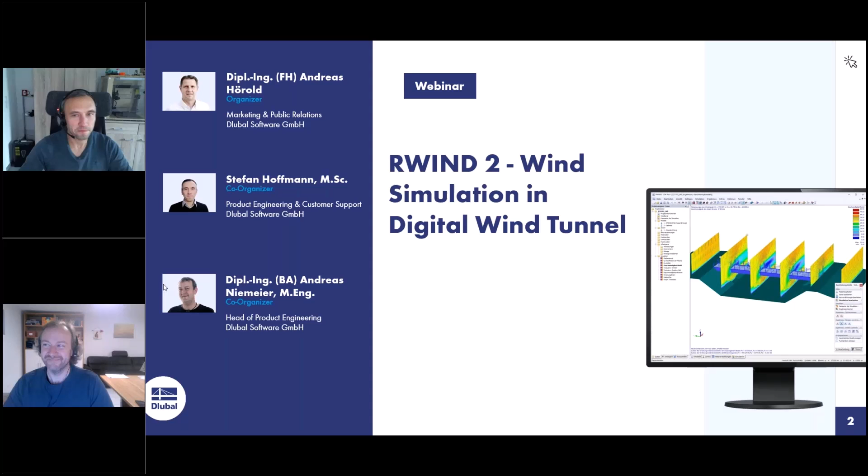Okay. There were some interruptions, but we could hear you. Okay, then we can switch off our webcams so that the attendees can see the full screen.

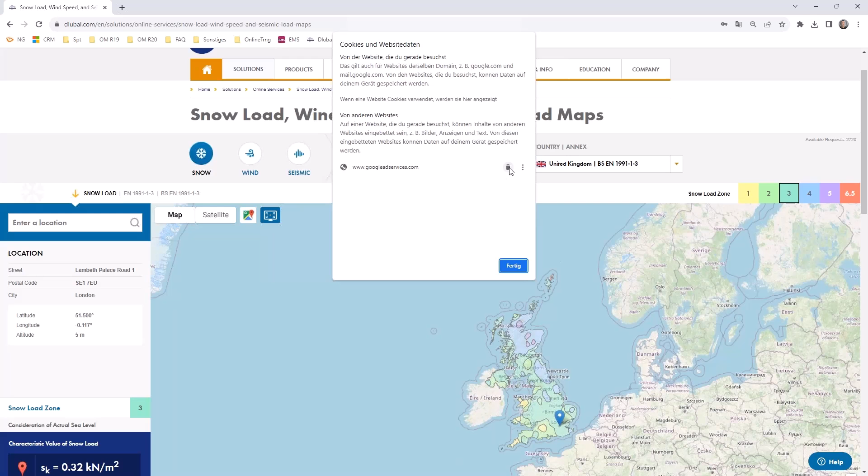So this is of course some data which is saved on the computer to quickly access a page, but it might be necessary to reload it. And then you can select if you want to allow all cookies again. And then the frame should load again for you if it did not do before. So let me quickly sign in so that I will have enough requests for today.

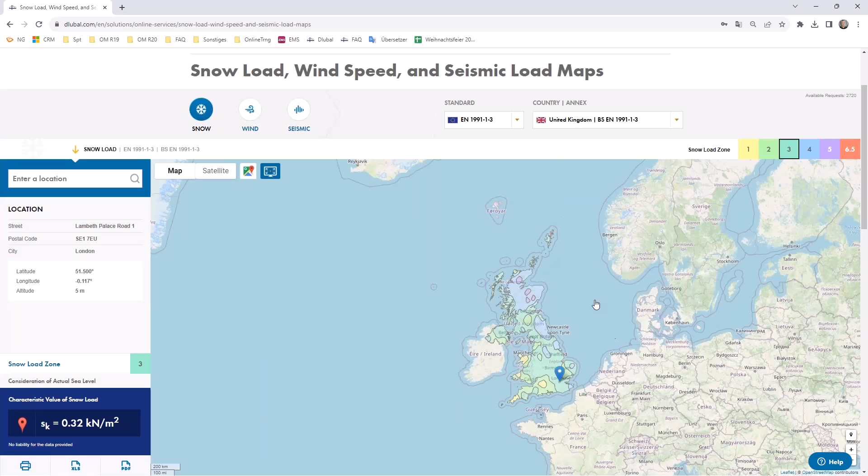And let's go again to the snow load map. So I think you're already coming to it. So it is not available yet for every map. So I do not think that it is available for Great Britain. Oh, it is already. In my tests, it was not available. Okay, so we can use, for example, Great Britain with the Eurocode 1991-1-4.

And then you see the small button on the left bottom of the page, which is of course still announced as being a beta. So please double check the values if they are correct or not. You can of course do that in RFEM, or at least be suspicious if they might be correct. It's still in a beta mode, but we do not want to not present it. So you can think about using them.

So if you once click on the button, you can already see the three diagrams you can now gain. So it's not only about the basic wind speed. No, you directly jump into the map and parameters according to the Eurocode, and it will create the diagram over a certain structure height. So if you would adjust it to over 20 meters in here, you would see that the diagram will of course be adjusted. And you can of course as well jump into the wind profile tab in order to copy paste the values with the level.

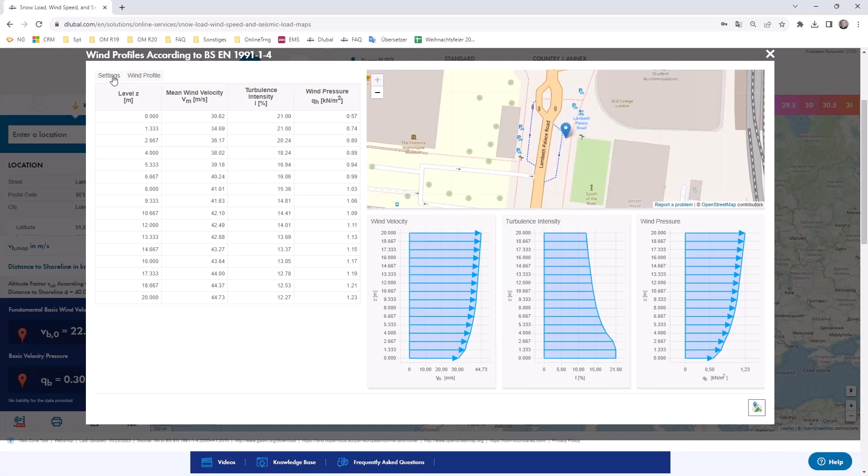What is then of course necessary if you jump into the RWIND main program for the definition of the wind profile and turbulence intensity profile. You can also choose that you want to have a user-defined definition and adjust all the values you see over here. You also get a closer look at the place where you are. You can also switch off the map if you rather want only a big display of the diagrams.

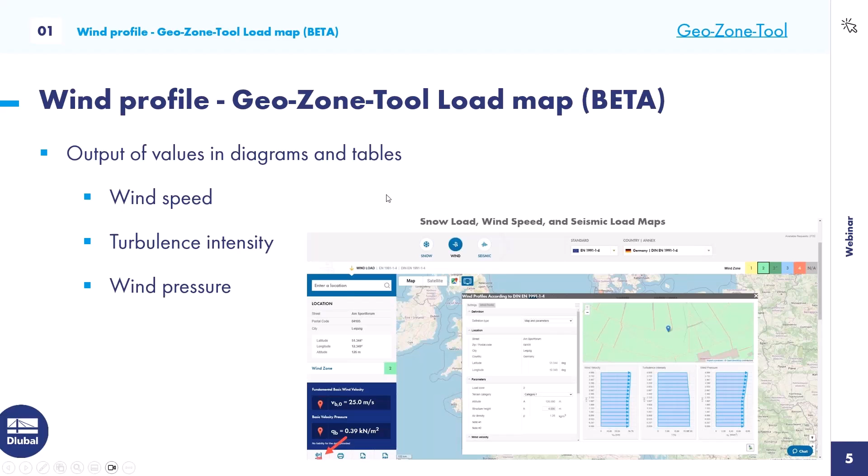So just once to remind you again, it's still in a beta phase, so it might not be available for every standard we provide, but this might be quite useful for you if you use RWIND without RFEM 6, or if you want to compare your hand calculations, or if you want to compare our calculations and tell us something might be wrong or not. So this was something not directly linked to RWIND. So let's now jump into the main part, of course, our program RWIND.

And this is my summary of the 4 features I would like to mention. Maybe you are not yet used to it, but you can also find all the data in our extranet. So if you log in with your account and you go into the development tab on this page, you can see features and also bugs. And this is most likely the place where you can inform yourself of what is new or what was fixed. And if you then restrict it to RWIND, this is in German, depending on the language which is set in your account, you can see that these features were introduced into the 4th version or the 3rd version and so on. And you could also check the bugs which were fixed for certain files.

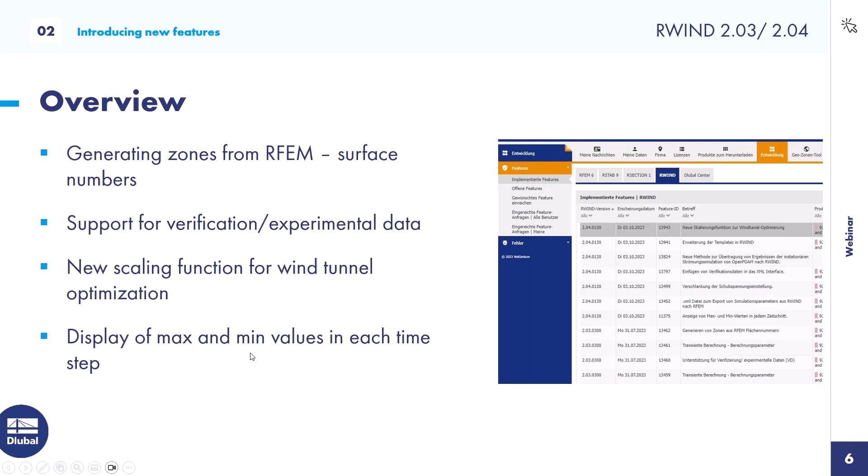So what I would like to talk about now is the first feature, the generation of zones from RFEM surface numbers. The next one will be the support for verification or experimental data. This will be the main part of today's webinar. The next one is a new scaling function for the wind tunnel optimization. And last but not least, we will quickly step into the display of maximum and minimum values in each time step. I have, of course, one slide for each feature, and then we jump into a small file in order to check where you can find it.

So you are now able to generate zones directly from RFEM surface numbers. Of course, only if you use RFEM 6 and then hand over the model to RWIND. We will now also hand over the surface numbering, and then you are able in the edit part of RWIND to generate zones from surface numbers. So each surface, which you can of course split as much as you want in the RFEM main model, will create a zone.

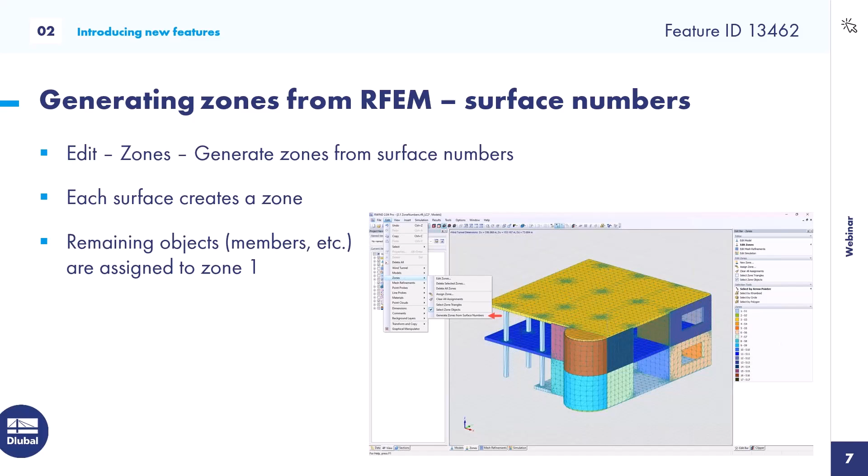And remaining objects, so you may of course also hand over members, they will also have triangles. They will be assigned to zone 1. So of course that's a bit of a complication that they are assigned to zone 1. But if we now step into my example file, what is also installed, it's the concrete building where I switched on the surface numbers. You can see that we have a surface number 1.

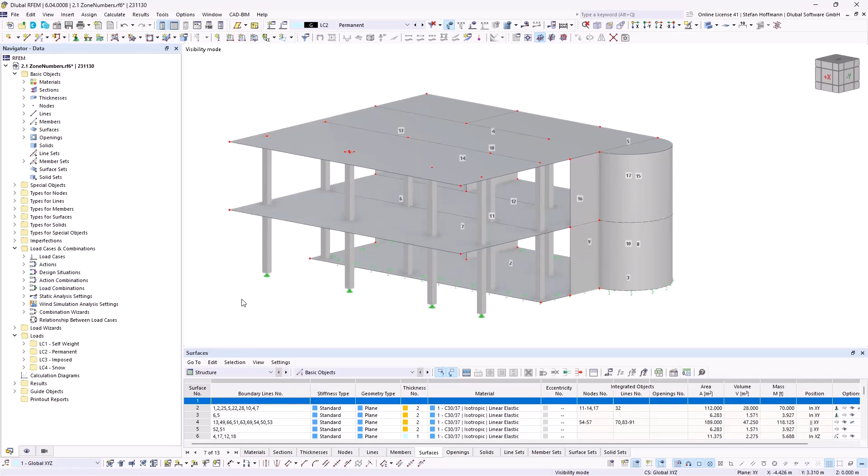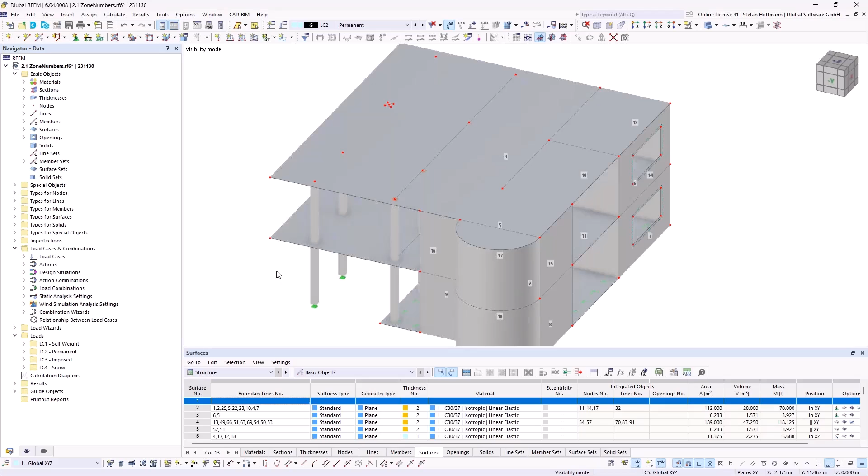And if you do not want that 1 also includes the member triangles, you just have to once go into the table and insert a row. So the surfaces will not start with 1, and all other things should be synchronized in the back. And now we have only surface numbers starting by 2, and all other stuff may be handed over to zone 1. If this is not fine enough for your difference, we will also see it in the main example later on. You might also right-click and divide surfaces with intersecting lines in order to create multiple or more zones.

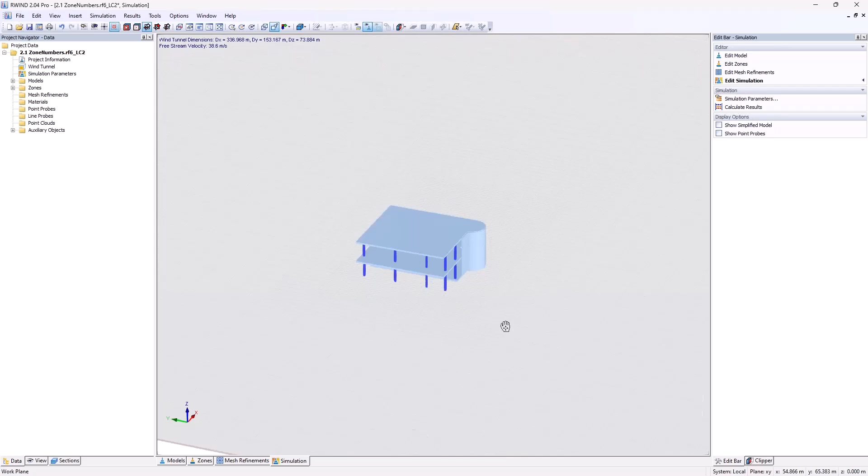So let's quickly create an example wind simulation load case. We will not care about any settings that are necessary to be taken. We will just open our model in RWIND, which can be quickly done by the button I used. So our geometry is handed over, and now there would be only one default zone. So it is possible for you now to hit Edit, Zones, and generate zones from surface numbers.

So you quickly see that there are now a lot of zones created, and you do not have to do that manually. So you don't have to create a new zone and use the selection tools to gather all the triangles which might be necessary for your file. No, if you already consider the surface numbers or a certain division in RFEM 6, you can already directly create these zones in order to quickly evaluate maybe normalized pressure over a certain zone. I will later on show you how we will use it on our monopitch roof.

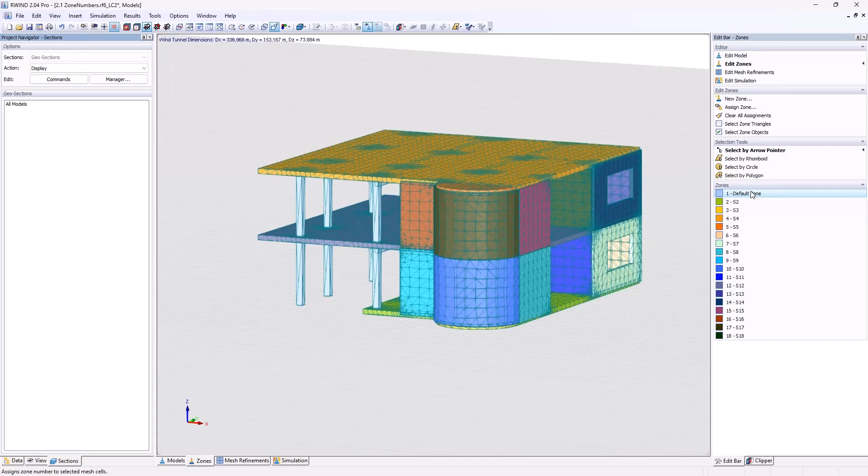And as told, you can see that there's of course also the default zone number 1, where you will then be able to find every other stuff which is not related to a surface number. Okay, so this was the first feature I wanted to talk about. We will use it later on in the next example. So let's close everything, go back to my presentation.

So the next one is the support for verification and experimental data. So we now offer you the possibility to enter verification data into the table. This is yet linked to point probes and pressure values that you can enter. And you can then display the data in graphs using labels, so the normal point probe labels. But you can also do a graphical representation of the differences between the verification data and the simulation results. You can switch that in the result navigator.

You can also choose the extrapolation of the data on the surfaces in RWIND using 2 methods, which are yet introduced. They are explained in the manual. And you can also restrict the verification data to be extrapolated to a certain zone. And we will later on use that, of course, in my main model.

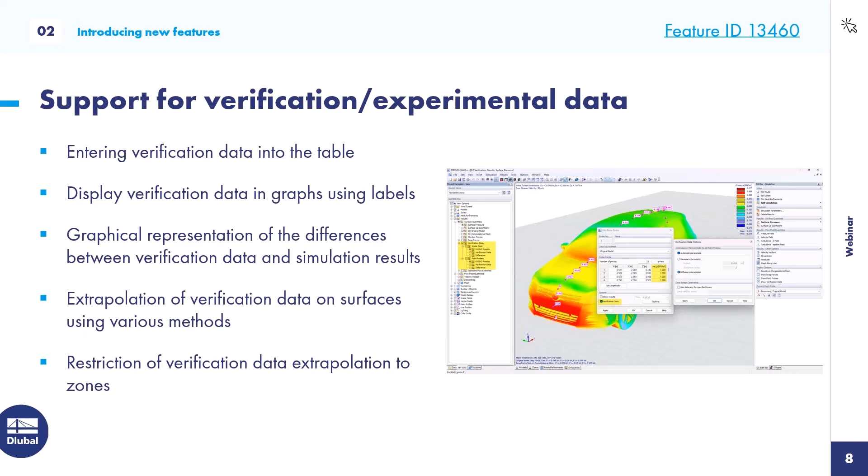But in order to introduce the verification data first, I use the Volkswagen Golf, which is an example installed already if you install RWIND. And then I have already defined a point probe. I activated the option for the point probe. It might be, of course, a bunch of probes you want to enter if you want to define certain values for zones. We now only did 1 point probe.

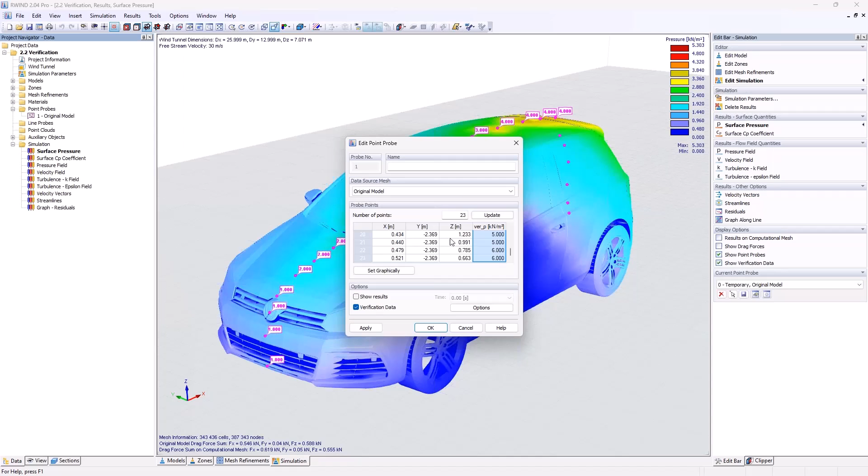And if you activate the verification data, you will get one more table over here where I have entered random values. So they do not come from any tests. I just wanted to show you the labels so that you can quickly estimate where they are and what they are doing. So then you will also be able to adjust the verification data options.

So you can choose the interpolation method, which is yet fixed to all point probes. So you cannot yet differ between Gaussian interpolation or diffusion, but you may set a different data range constraint for certain zones. We will see that later on in the other example. So if you also do not know about Gaussian interpolation or diffusion, you can just hit F1 on the keyboard. And usually it should be linked, but maybe we did not yet do this.

So you can quickly, of course, search for verification, wait some seconds, do not wonder if you do not need to hit enter, and then choose the topic, which may be about verification data. So there is some general part of it.

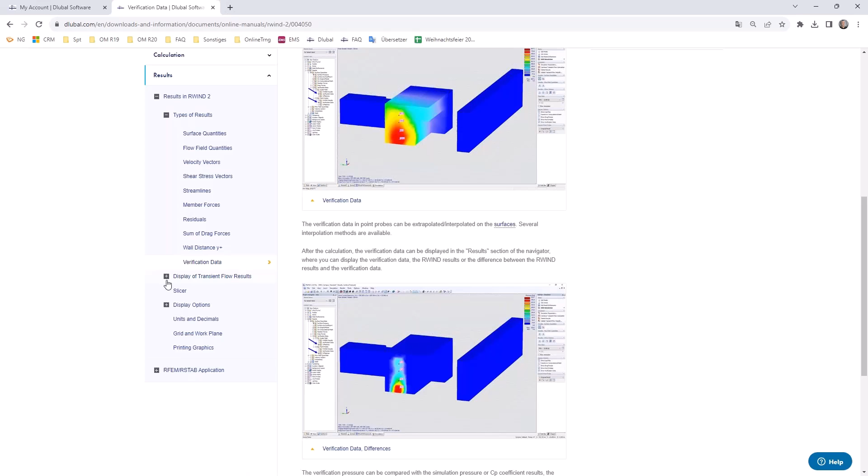And if you go into the probes, I think, we quickly search it, then you can see the explanation about both interpolation methods. So just scroll down and then you will find the information about the second interpolation method, or I think also about the other ones. Yeah, so we will not go into the theory behind it now. You can double check it if you are interested later on.

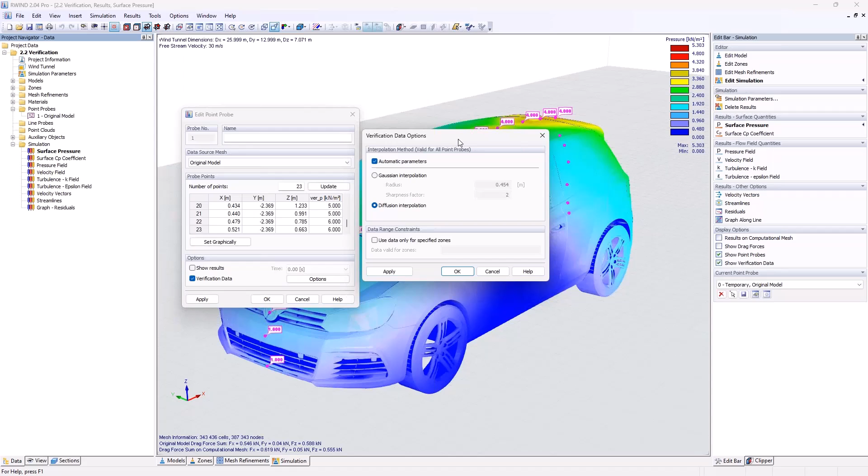What I do remember by myself is that this will most likely diffuse interpolate about a whole area in slides. And with the Gaussian, you can set a radius which will interpolate, but we will once again, of course, later on show that.

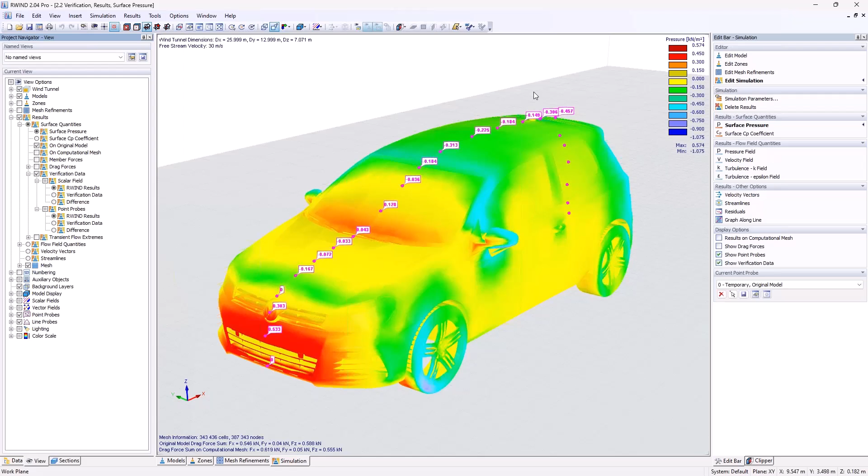And if you have these results, you can always differ between the verification data of the scalar fields and the point probes. So you can step over and show the results you get from the numerical wind tunnel analysis. And then you can, of course, also switch to the verification data. And I think the biggest influence will be the difference. So you can directly check according to the colors how far our calculation is maybe away from the standard, which does not really mean that it must be far away from the reality.

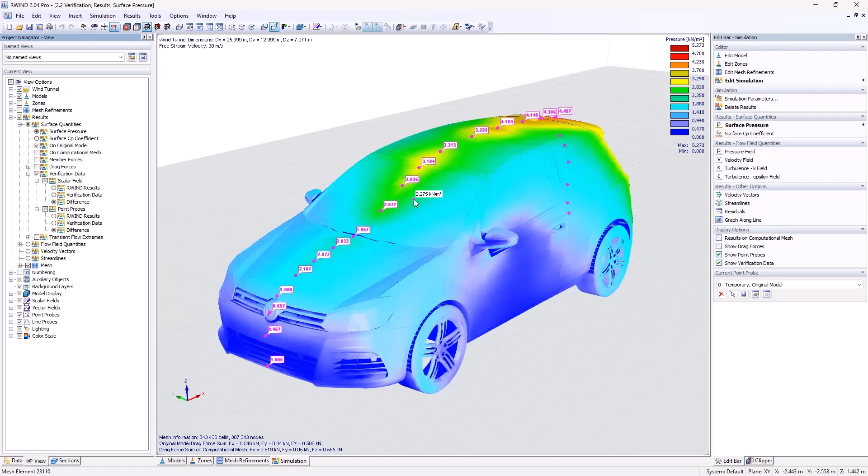So there's, of course, always the question, how can we verify our model? So from my proposal, every FEA analysis or also CFD analysis needs to be, of course, verified by a wind tunnel experiment. And then you can enter the data and check if the assumptions you make in this complex CFD analysis match reality. All right, so we will later on use that feature, of course, once again.

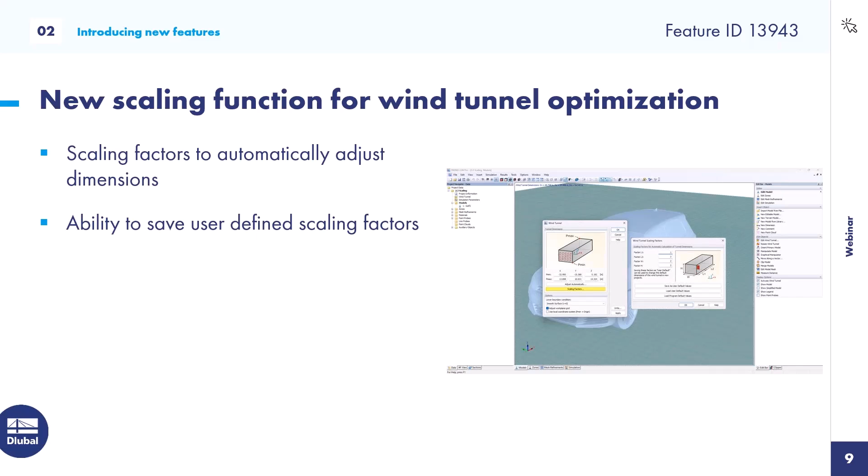So the next part is the new scaling function for the wind tunnel optimization. So you are now able to define scaling factors to automatically adjust the dimensions of the tunnel, and you will be able to save the user-defined scaling factors. So let's quickly jump into the example, which is once again the Volkswagen Golf car. And then you usually double click on the wind tunnel. So let's zoom out a bit maybe.

And see these automatically adjusted values. And then there is a button for the scaling factors where you can now define your own values. Usually it is like this. So it is multiplied with the normal values you have in the program. So this is the wind tunnel the program will offer you. But we propose most likely, if it's going into a more detailed calculation, a recommended wind tunnel size.

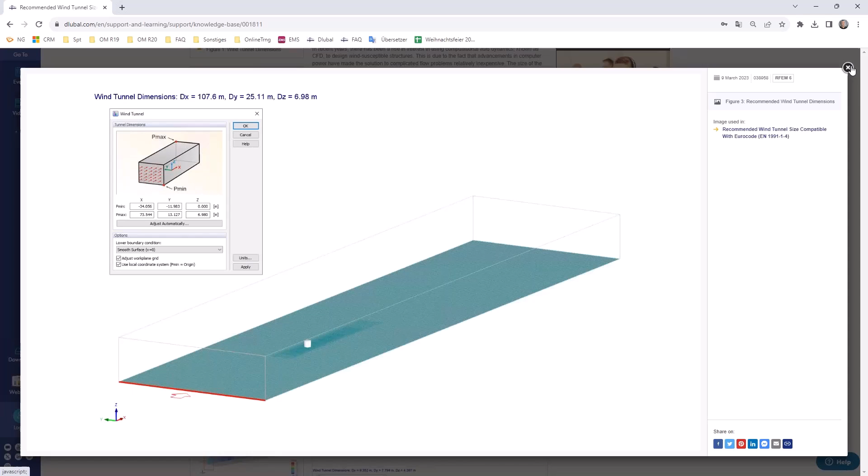So if you would like to match the technical article, I do not like numbers with decimals, so it would be 2.7 in this length, 1.6 in this direction, and 1.85 in this direction. I would use 3, 2, and 2, hit OK. Then you will be informed that these are just the factors used, and you have to use, of course, the adjust automatically button once. If you then hit OK, you can see, well, it did not change a lot because I think it was already bigger in front.

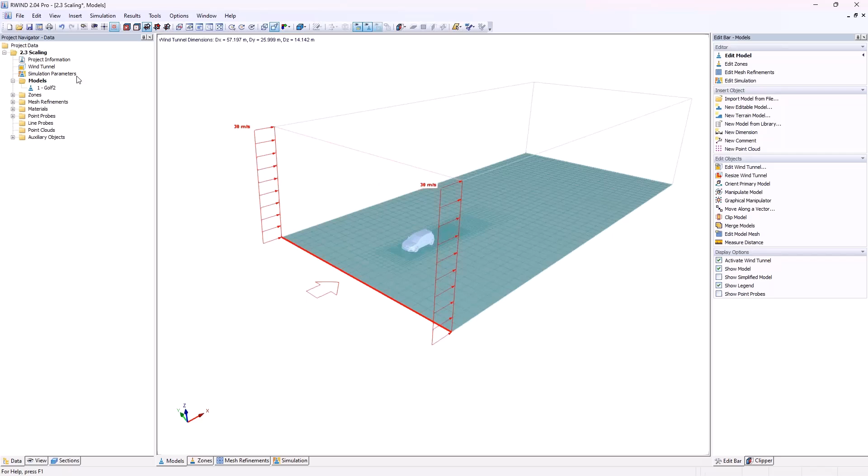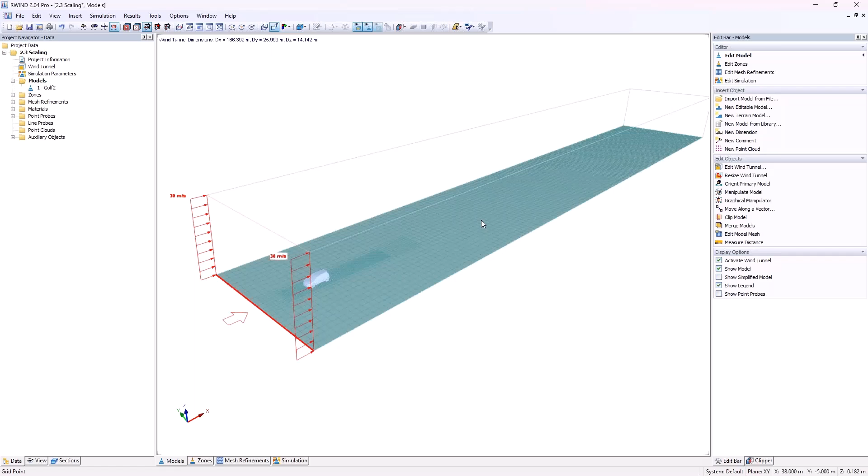But then your wind tunnel will be adjusted according to the factors you enter in here. So if you put 10 inside, say OK, and adjust it, then you can see that this factor is going to be increased a lot. And then this will offer you the possibility to not think a lot about meter values, but to quickly enter the factors you would like to use, save them, load them, and apply them on your model.

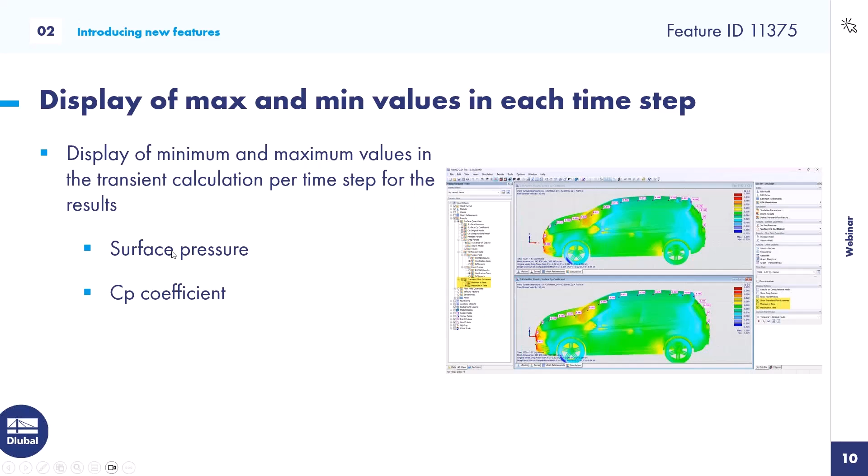So the last feature I would like to present today is the display of the maximum and minimum values in each time step. This means it is for the transient calculation, limited to our RWIND 2 Pro version. It will offer you to have some kind of envelope for surface pressure or CP coefficient values.

So let's jump once again to the golf car. There's also a transient calculation file for the golf car. So what it is about now is that usually if you do not show the transient flow results, you will have a slider over the time where we can see, most likely on the back part of the car, that the pressure will of course change over time due to the wind acting, of course, turbulent.

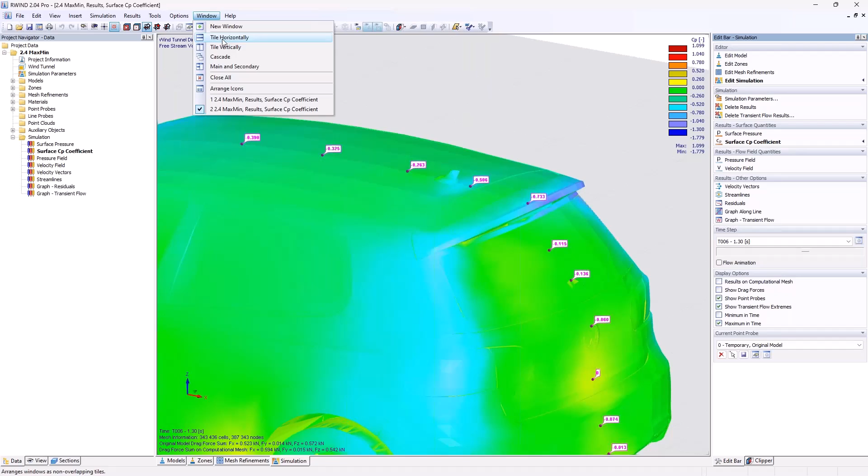And then it would be kind of hard to evaluate where will be the maximum suction or the maximum pressure. Or if you are lazy and don't want to check that, you will now be offered to show the transient flow extremes. And if we use 2 monitors, we can once show the minimum in time, which might be minus 0.814 - so it's of course the minimum with a minus. And we can then also choose to show the maximum in time. So this same point probe would be, in a transient calculation over time, gaining the values of minus 0.733 or minus 0.814.

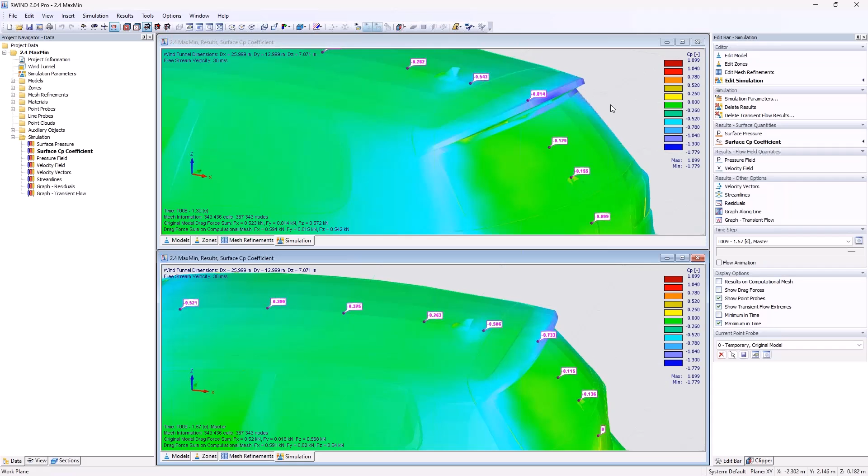So this is one way to determine the maximum or minimum values for your structure or your file. You can, of course, also switch that value in the view navigator, but I think the quickest way is, of course, to do it on the right.

Okay, so this was kind of a slide presentation, but was also stepping into the program. And now I would like, of course, to show you how we can use the feature of the verification data on an example. So it's a building, it's 10 meter long, 8 meter wide, 4 meter high, and it has an angle of the roof of about 5 degrees. So it's a monopitch roof.

So we will start with a fresh model in RFEM 6. Let's give it a name - it's the name of today, and it's called monopitch. And what we, of course, need to activate - we will not do any design to elements, it's just really about giving our model into the wind simulation analysis and gaining the pressures of it. So I will only activate wind simulation.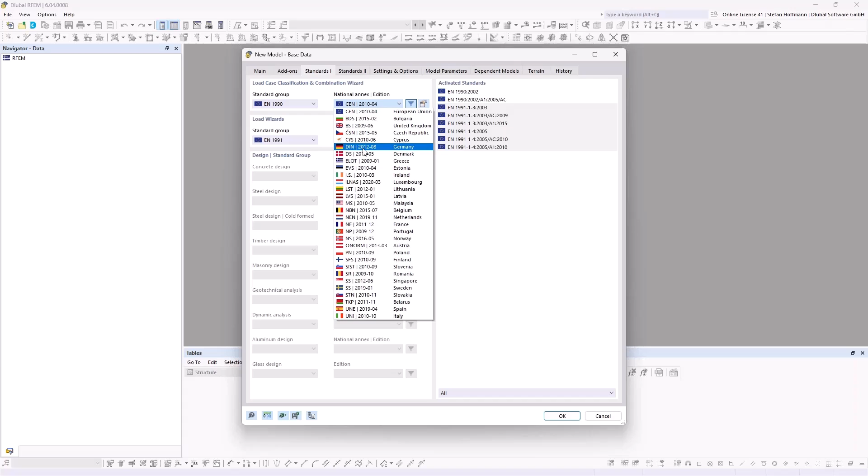I could activate all because I'm working for Dlubal, so I'm not limited to any add-on, thanks to that. And we will do it according to the German national annex, because we are quite used to do so, and we also tend to present our English webinar for the German annex.

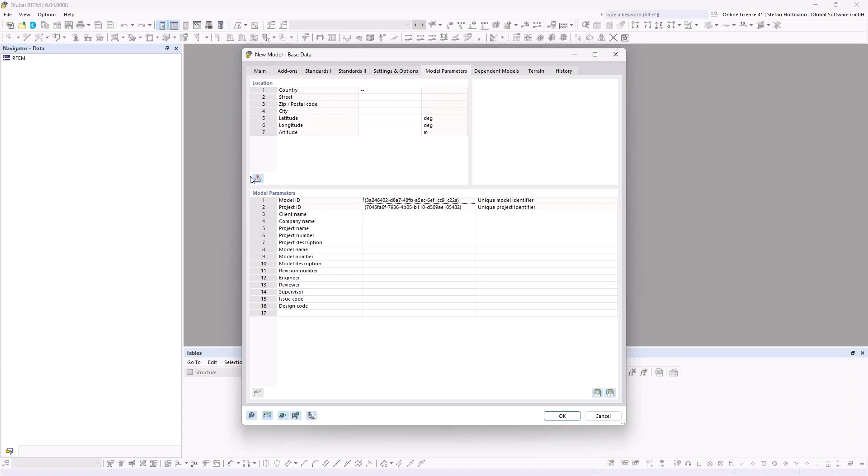What you can now as well do is choose already a location in the Geo-Zone tool if you want to. We will do that later on. And you could as well also define a terrain. Just remember, it is possible, but since we would not like to have any influence by neighborhood or by the terrain, we just skip that.

So once the file is loaded with all the data used before, remember that the first angle of wind simulation load is going into the global X direction. So I tend to rotate my model because I dislike to rotate the wind load.

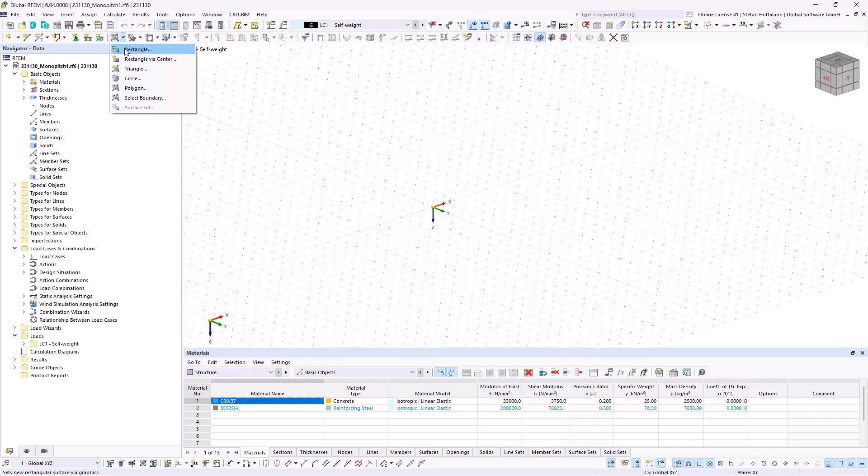And I will now start by modeling the bottom plate. So I will simply use the rigid type because I'm only interested into my wind load on the structure. I'm not interested in any design yet for the building, so it does not matter if it's concrete or metal - we can just use rigid because I do not account for any stiffness.

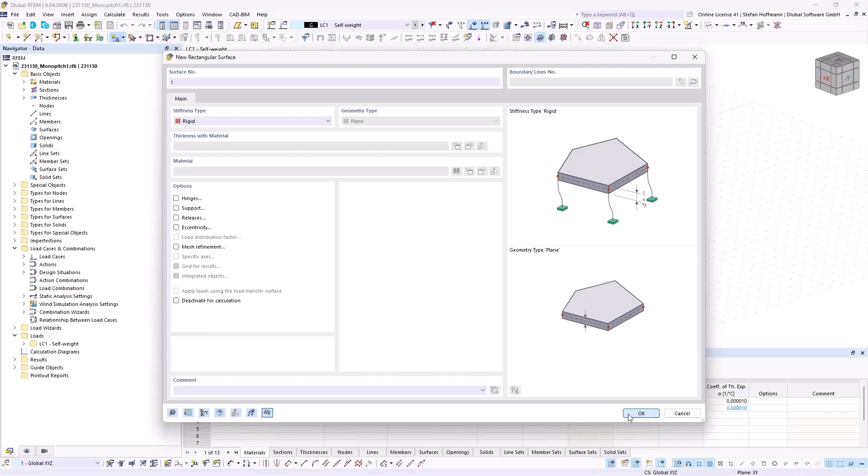So now I told that it is 10 meters times 8 meters. So we would now, of course, need to define this size in our program. So where did I choose it? I'm starting at minus 5 and we're going to 5 and 8. So this will be the bottom plate.

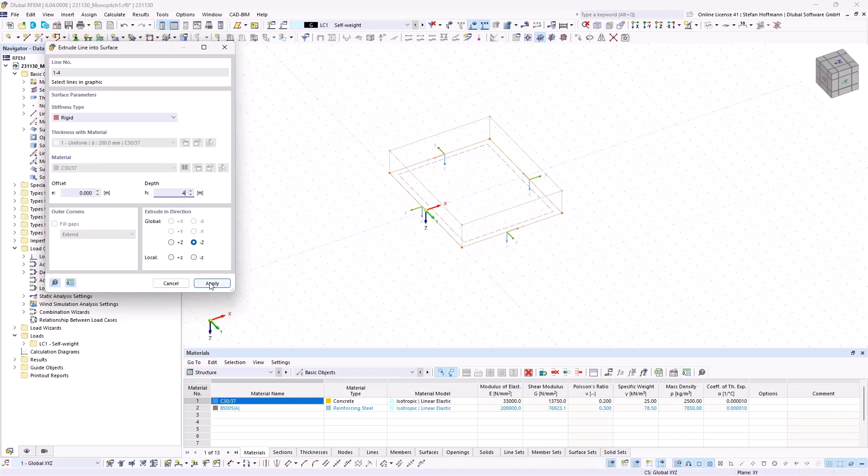Then we can simply, with the control key on the keyboard, mark all the lines, right click on them and extrude them into surfaces. This will offer you the possibility to quickly model a surface. We will once again use the rigid type and the height should be 4 meters into minus Z. We apply that, and we most likely have already our hull.

You can of course switch into this display if you like it even more. Then I would just mark my bottom surface and copy paste it with the control keyboard and snap it to the top. We of course need some boundary conditions at least, so I would just apply some line supports, being some singular foundation on the length. And then it's of course about to define the angle.

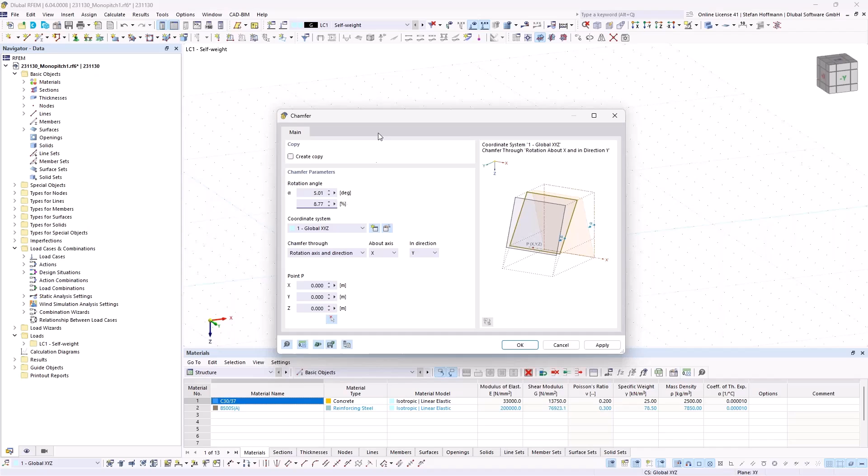You can quickly do that by simply hitting the surface and using the manipulation tool to chamfer it. So you can now decide that you want to chamfer it, for example, 5 degrees. Due to our wind load assistant, I use 5.01. And then we need, of course, to think about what will be the direction.

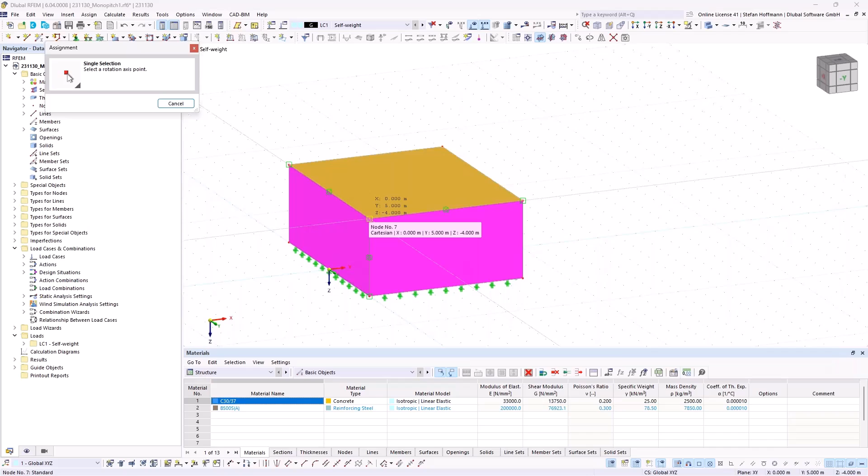So it is about our y-axis, this is the turning point, and it should be into the Z direction. So we want to have it into the global Z direction. Since we use this point already, you don't need to choose it, but we can of course once choose a node in here. And if we hit OK, it is moved.

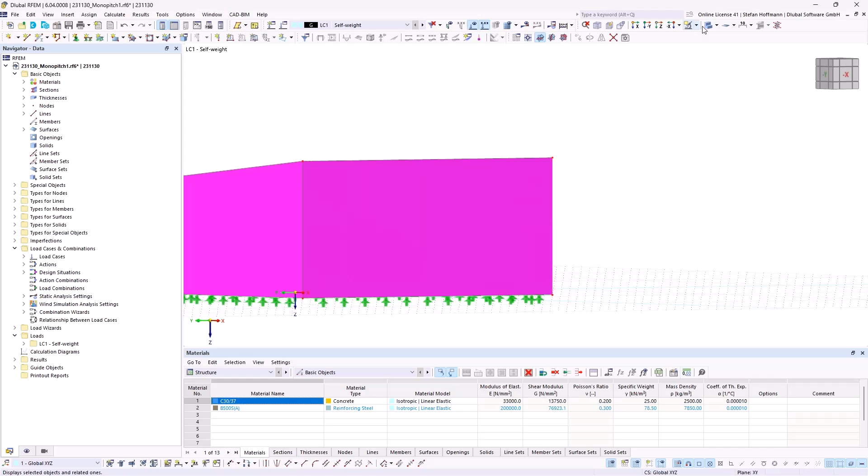Since I only selected the surface, all other combined elements are not moved. So we could simply mark everything before, or we now just mark both nodes and drag and drop them to this position. Then you can see that the surfaces are quickly adjusted. So it's quite smart if you would like to model close to a CAD design, I think, that you can use drag and drop and so on.

So the next thing we would like to do is, of course, to check the wind load areas. We can do that with the wind load wizard. This is now our wind, this would be the standard approach, and we are now only interested in the mono pitch roof.

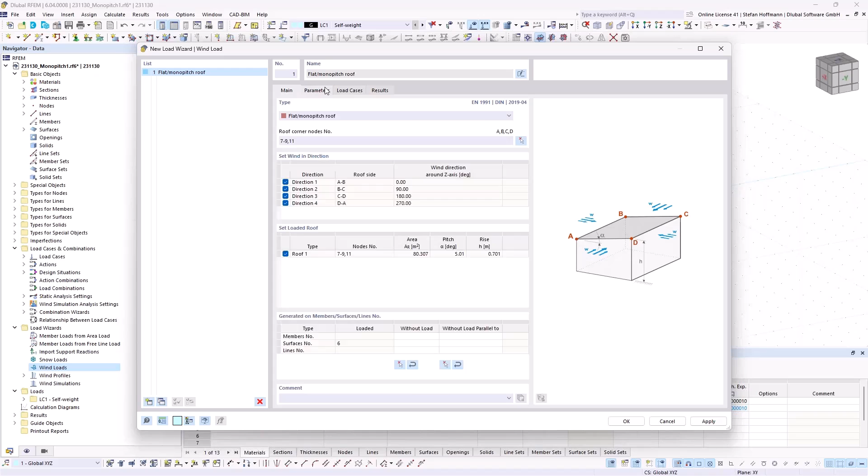And then you see the picture, what 4 corner nodes you need to choose. So we simply pick our 4 corner nodes and hit OK, and then we introduce the parameters. So now I hit the button to jump into the Geo-Zone tool, and I will use the location of Leipzig. It does not matter where we are.

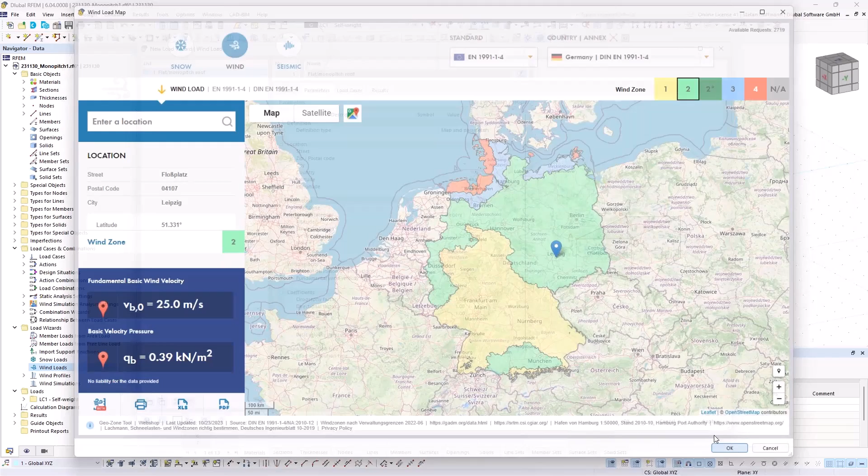You can see that the German standard will choose the wind zone 2. I will load all the data. It will gather all information from the Geo-Zone tool, so we do not need to enter them manually. Then I can adjust the structure height, which is roughly 4.7 meters, and we will use terrain category 2.

If we do that and create all the wind load cases, we can quickly estimate the results already. So you see the load directions and you see that our zones will be split. If we jump quickly back into this part, we will be given all the data, what the standard will give us. So the width of zone F, E divided by 4, is 2.35 meters, and E divided by 10 is 94 centimeters. So you will be given this information.

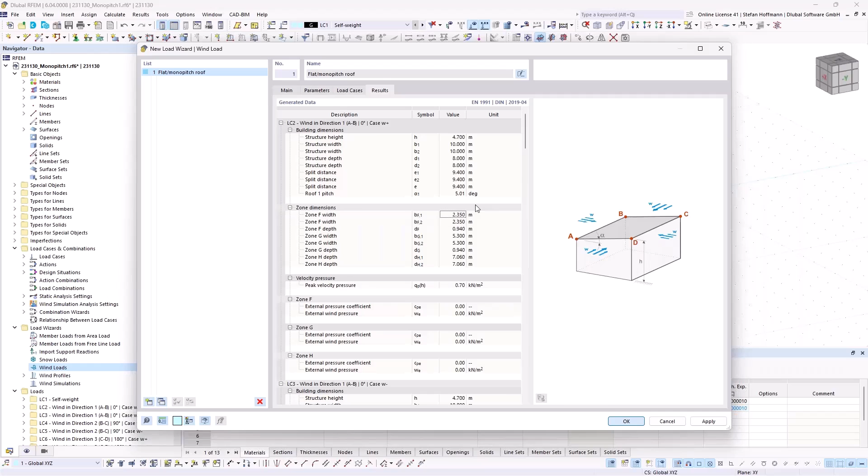This is why we do it as well shortly with the load assistant. And if you display it, you can see that this is the load or the suction we are going to experience in our wind, and we will then check it.

So let's continue with what we now want to do: we already define zones, so we would like to split the roof into parts. For that, we would like to have our lines showing into the same direction. So now we can use both lines, hit the right mouse button, and divide the line via distance.

So now we could just simply enter 94 centimeters, but it is meant as a projection showing from top. So you are now able to use the projection of the line into the local X direction. You can enter 94 centimeters in here, and if you do that and hit OK, you can quickly divide the line using it for further modeling.

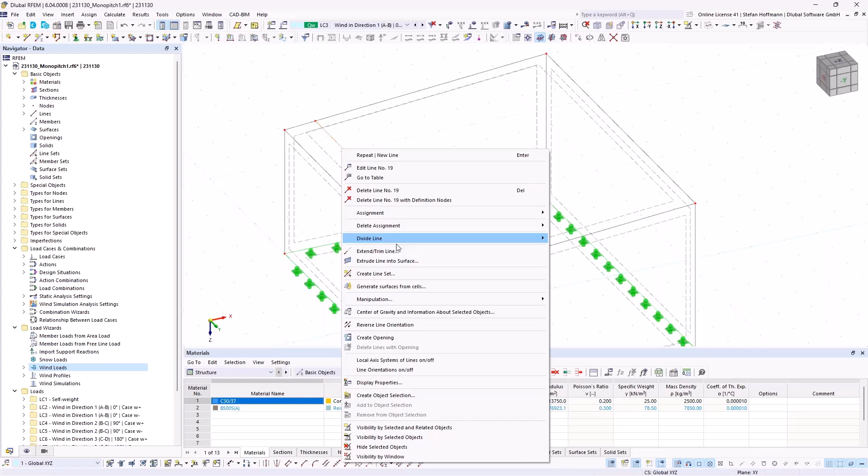We will now simply draw a line into here and have the line which is going through, and then I told that the distance will be 2.35 meters. So we will use this line and also divide it with a distance.

It's not about the projection or anything since it's the same if we use it, and split the line at 2.35 meters. We will also divide the line at the distance at the end, 2.35 meters. So if we now have it, we can mark this node and copy it from this point to this point, or you can try to hit the tool in order to snap the perpendicular part.

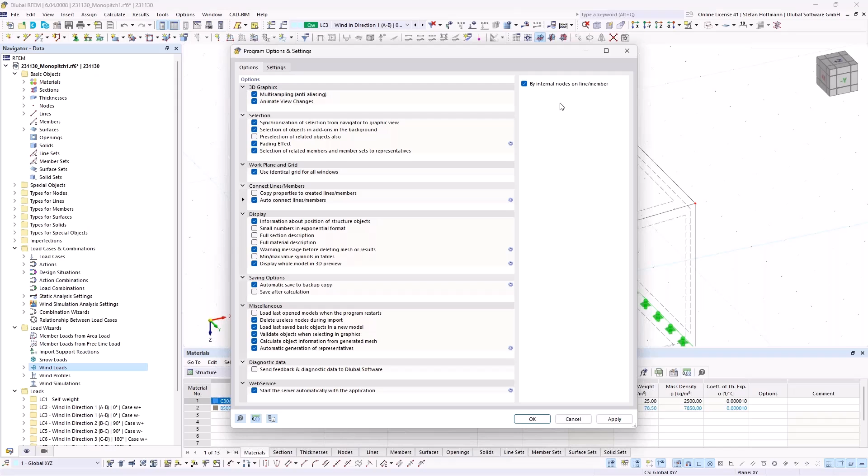I'm not sure if I activated it, so I just use this line and copy paste it over here. If you are curious why there are red nodes or blue nodes created, whether the line divides or not, you can step into the program options and choose the setting for what it's supposed to connect, members or lines. If you don't manage to do so, you can later use this function and check if the lines will be divided.

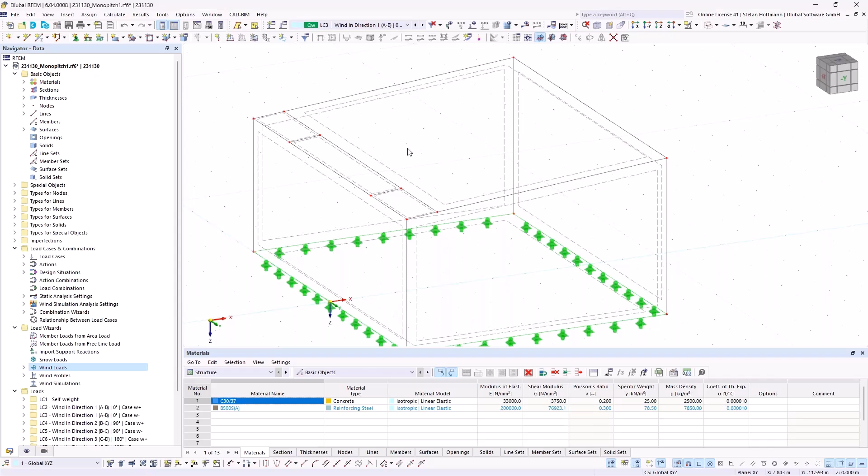So the last part we need to do in order to have certain surfaces is to right-click on the roof and divide the surface with intersecting lines. And voila, we now have 4 surfaces for the top, which will give us 4 zones as expected, which we would like to compare with our experimental data. So this is one possible way; if you have a quicker one, you can also use your own way of modeling.

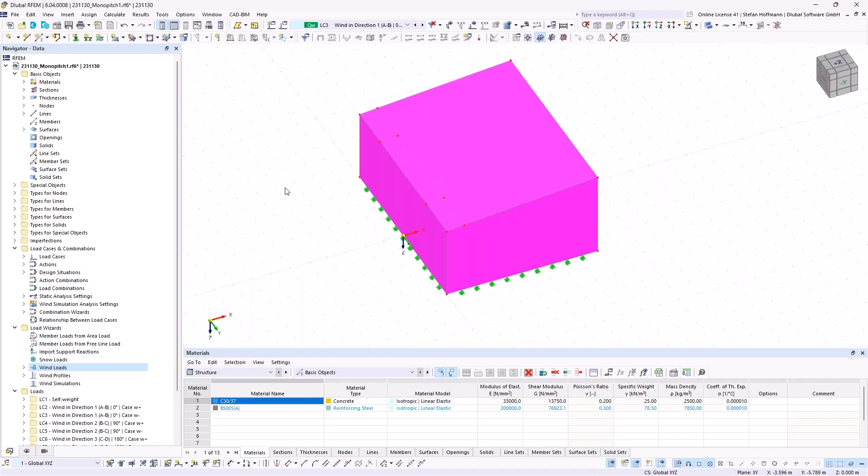Next we need to step into the mesh settings for the wind analysis in order to check what wind simulation options we would like to use. You can think about the level of detail or simplification of the model, and whether only visible objects should be handed over. Since we do not have members, we can deactivate this option. We will also not hand over any terrain or surrounding models.

Let me shortly drink something.

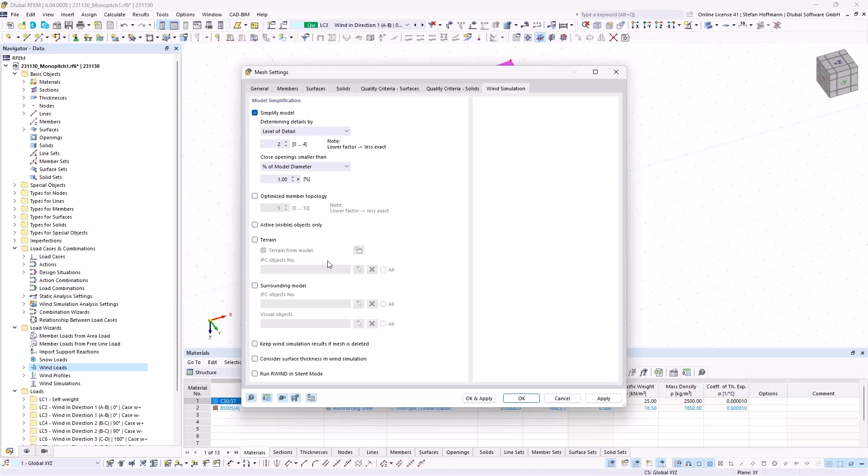We will also not keep the wind simulation results. Since we use rigid surfaces, we do not need to think about surface thickness. Running RWIND in silent mode is mainly supposed for when you have a lot of load cases and don't want to double check them or manually start the calculation in RWIND. You can disable this button, and once you calculate a wind load case, RWIND will open and you will be given the option to adjust everything, if you want to double check the model and start the wind calculation yourself.

The next part is that we need a new load case, of course. It will be the action category wind, and it has to be the analysis type wind simulation. Then two registers will open on top, where you can choose further settings for the wind simulation. The first one would be the wind profile.

If we step into it, you can see this is once again related to a certain destination, so we check Leipzig again to load the data inside it. You can also manually define it if you want. We would just change to category 2. The height is taken automatically by the program, and we will not adjust any other factor inside this. There you can already see the profile, which should match the ones I showed in the beta phase, but due to the beta phase there might still be some adjustments.

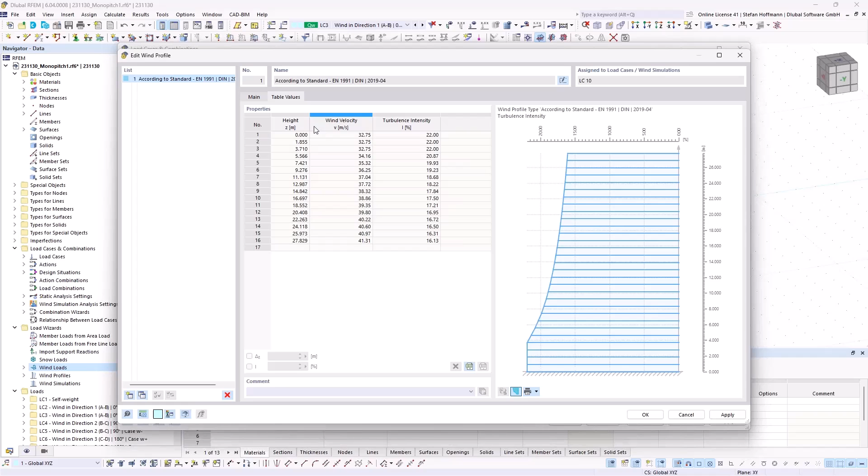Using this button, you can switch between the turbulence and the wind profile, or you could also see the wind velocity given in the tables.

If we've defined it, the last part would be to double check the wind simulation analysis settings. So whether you would like to do a basic steady flow calculation or a pro transient flow calculation is always up to the structure and turbulence you are expecting. We will simply do a steady flow calculation using the presets given here. And if it's up to certain controlling standards, we would propose to also activate the boundary layers, but for this please check out our technical articles, because Mr...

Kazemian did provide a lot of verification examples and also a lot of nice-to-know facts for maybe beginners in a CFD analysis, because we offer a tool with a quick estimation of results. And there are still technical parts behind it that you may be curious to know about. There are other things you could adjust, but we will just leave it like it is.

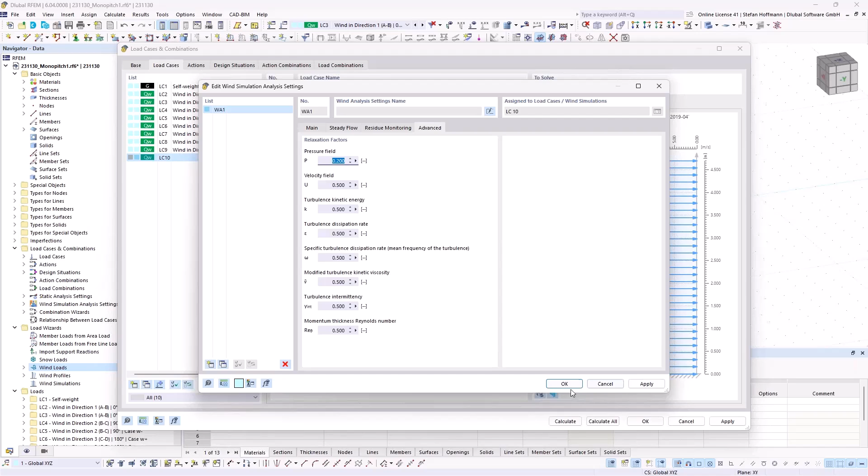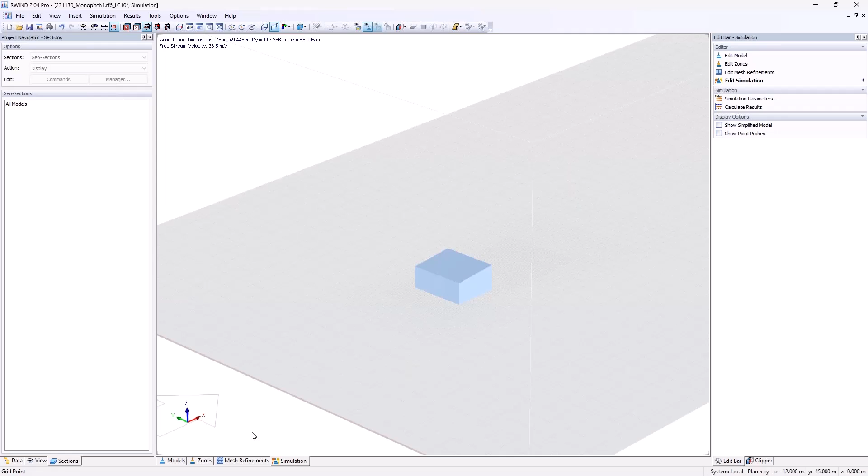So if we would now hit OK and start the calculation of LC10, you will see that it will now hand over our model to RWIND. It will start RWIND, and we would now be able to do the stuff we would like to do. So currently it would be necessary to manually generate zones from surface numbers that you can later on use. Of course, we are planning that there should be some automatic option, because usually you would like to automatically create zones.

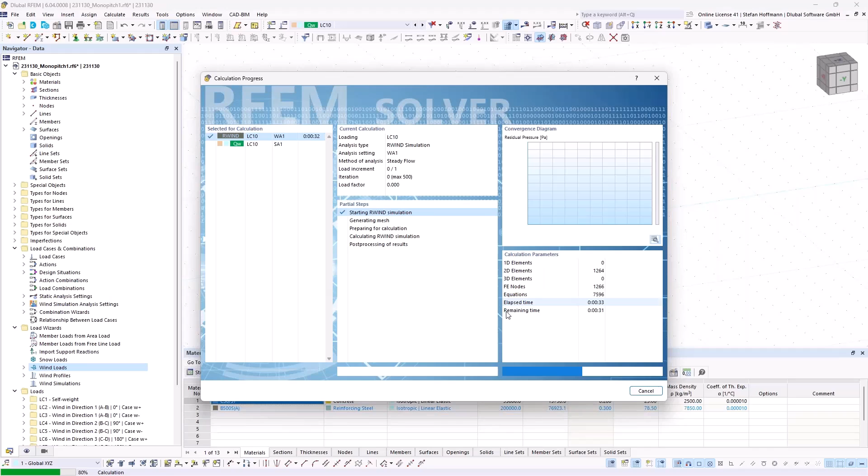If everything is done, we could now start the calculation, but since this will take 5 to 10 minutes, even for this file, I will not do it in this file. I will open my already calculated file. So of course, RFEM will give me some error. Okay, I did already run the file for you. So let's make a jump in time. So 10 minutes passed. We now have our results on the model.

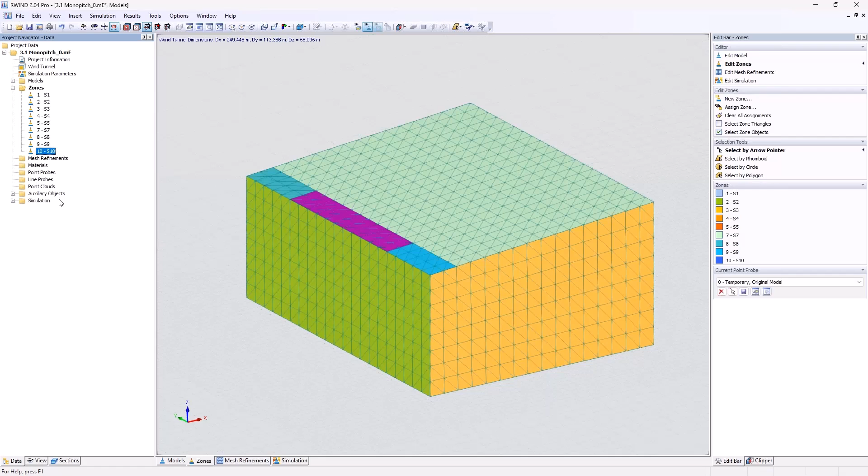Let me quickly just delete the line probe I already defined in here. So we have our zones already defined. Our zones, I always have to double check: zone 7 is the big part H, 8 and 9 is F, and 10 is G. I hope I will remember it. If not, I will have to double check it again. So what we are given now after the calculation is, of course, the pressure for our front, our roof, sides, and so on with the certain values.

And now if you would like to compare that to different standards or to your analysis, we will define a new probe. I will name it F for the zone F. So this will be these small parts in our model. And then we will define it on the original model. If you are curious what the model meshes are about, there is a big chapter in our online manual, because this is one main part of RWIND: we give a maybe non-topologically correct model from RFEM to RWIND. It will create a fine mesh for the CFD analysis and transfer the forces back onto the model.

So let's start by setting point probes graphically. We are now only interested in the roof. So for the part F, I will use 2 probes over here. You will see them soon. I hit finish, and then I will quickly switch to the RWIND results, because it was still set to show the verification data. And then we can see that we have those 2 point probes giving the results at this point for our zone.

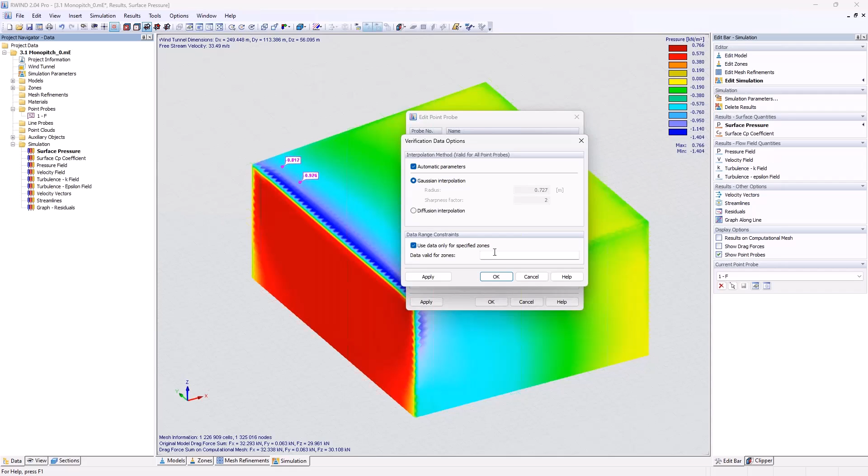And if we now would like to introduce verification data, we just apply this button and we will check what the standard is thinking of. So it's minus 1.19 kilonewton per square meter. So let's enter minus 1.19. Oops. And quickly check that this will only be used now for zone number 8.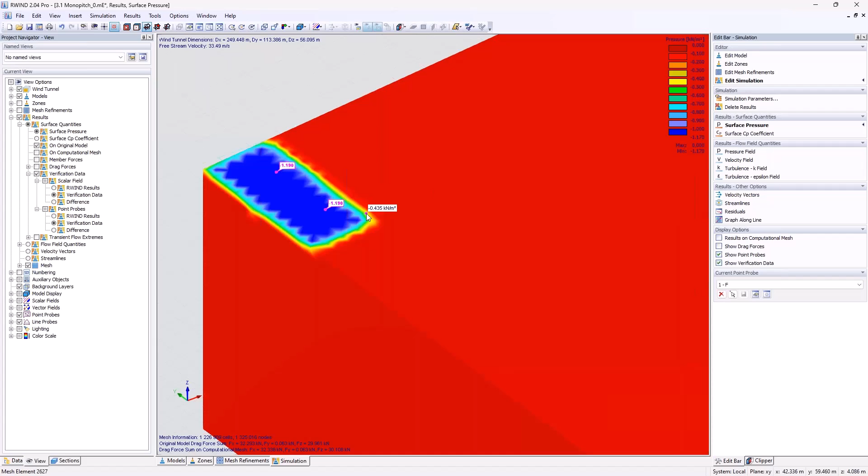And let's use the diffusion interpolation, say okay, and let's quickly switch the data to the verification data, because I think this is a smart way to see what the logic is doing behind it if you enter these probes. We now inserted 2 probes for the zone. We restricted it to be only interpolated in this area. So what it tries to do is to keep the minus 1.19, and towards the boundaries, to the other surfaces, it tries to interpolate.

We can also restrict it to 8 and 9. And then we see that the interpolation is done in a bit different way than the diffusion. So if you see diffusion, it is using a wider area, and Gaussian is using the automatic parameter defined in here.

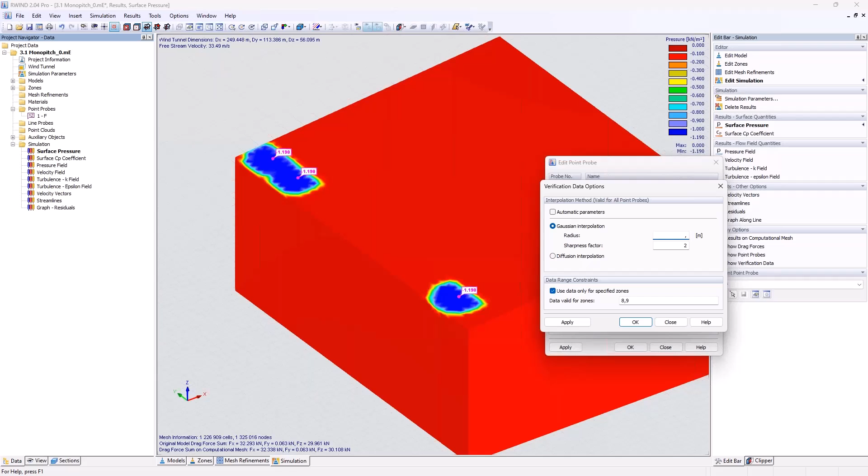So it's a radius around the dot of 7.3 centimeters. We could also uncheck the button and increase the area or decrease the area. So it depends on how many probes you would like to set. So in a normal wind tunnel analysis, in reality, you have a certain amount of probes over the height.

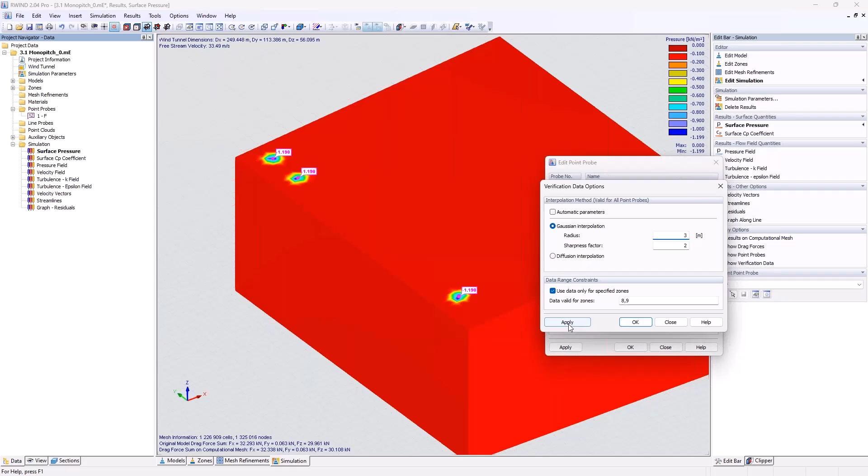Since this would most likely extend my webinar to more hours to introduce such an amount of probes, we will only use 1 probe this time, and we will simply increase the radius, for example, to 3 meters, because this way most of the zone will be covered by my defined verification data, and all the other stuff will then be later on interpolated. So we will set a new probe for the next area.

So this would be G. We will set it graphically. So we will once again only use 1 dot. It will be more usually. So I set by mistake 2. So let's only keep the first one we used. You can also later on adjust the values we used in here if you need to do so.

And we will now once again define the verification data for this part. So let's jump back. Should be minus 0.84 according to the standard. So let's enter it. And as you can see, this part on top is limited for all probes, and we will define this probe only for the part number 10. And then you can see that it will also interpolate between the zones a bit better than it was doing before. So now we have already defined 2 parts.

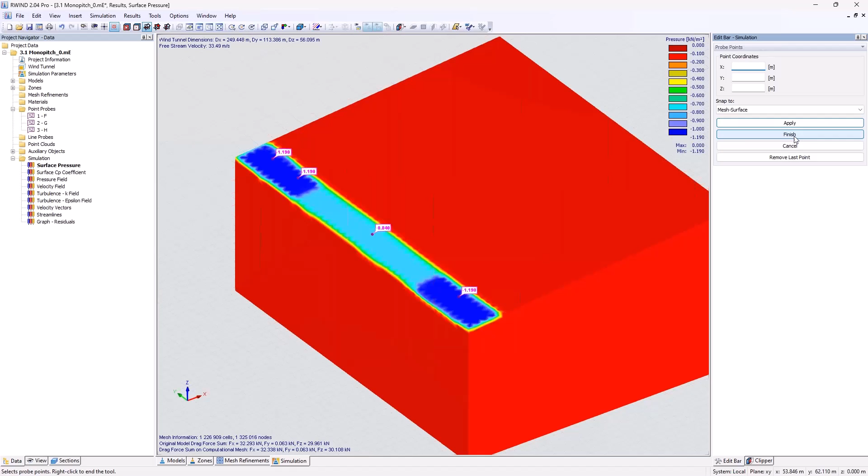So let's enter our last probe, which would be about the H area. Once again, I only set 1 probe over there. We define the verification data, which is supposed to be minus 0.42, sorry. And we assign it only for the zone number 7. If we hit apply, we can see that our radius, since the zone is about 7 meters and 10 meters, is way too low, but it does not matter.

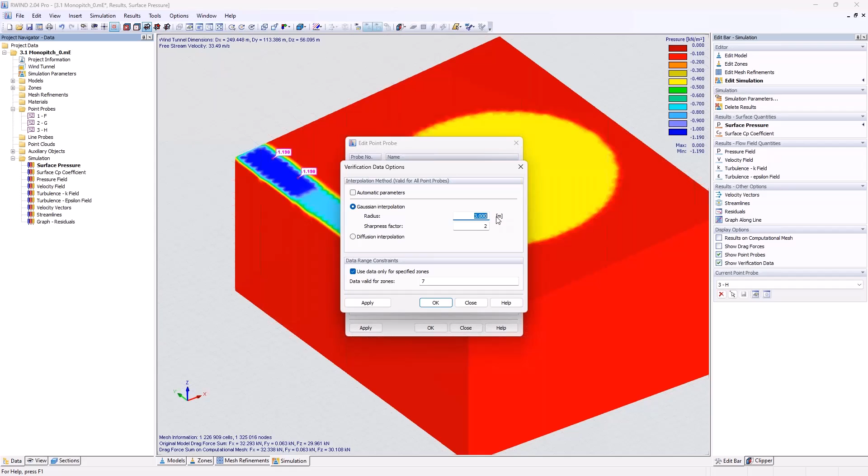We can, of course, increase the radius over here, for example, to 6, for our example, to extrapolate our value to the whole zone. So if we did that, we now have a smart graphical representation according to the values. Of course, the standard is offering you, I think, some summed up value amount for the zones. So you would only have yellow, blue, and light blue for the zones, which might, of course, differ from the reality values we achieve.

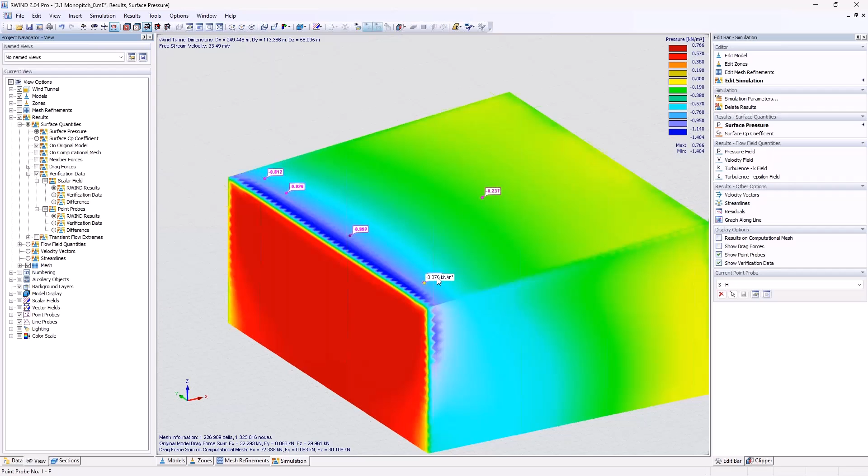And now we can go into the View tab and say, okay, these are our RWIND results. You can see the probes, of course, also then show the values RWIND is giving us. This is the verification data, and now big drums. We can now also check the difference. Let me quickly restrict our zones only to the roof. You can do that usually in the section tab.

And then we can see that the dark blue would be a difference of 0 most likely, and the further away we are, we will have a bigger difference. But of course, what the standard is not really taking into account is maybe a finer determination of an area. So we might have some bigger differences to the standard. What I did not do is a long calculation. So what I did is having the wind tunnel size recommended, but only a model simplification factor of 2. So this is not the calculation giving the best results, but some quick results.

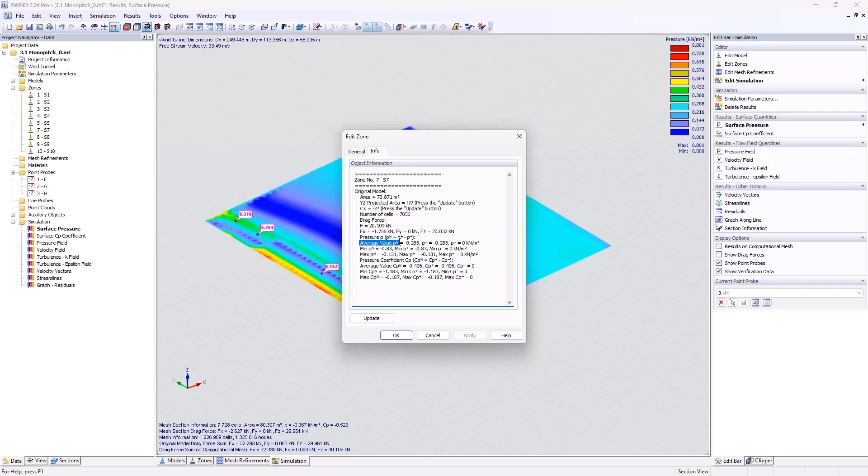And we can see that, well, we are, of course, away from the standard in certain areas, but you could also try to double click on a zone. So let's, for example, use zone number 7 and get the information about what are maybe the average values inside the zone in order to double check them as well and compare them to the standard. So this is most likely the biggest new feature we introduced for you in order to compare the stuff with experimental data.

So what you could, of course, also do is enter more probes, define more areas, and think about what verification interpolation you are going to choose.

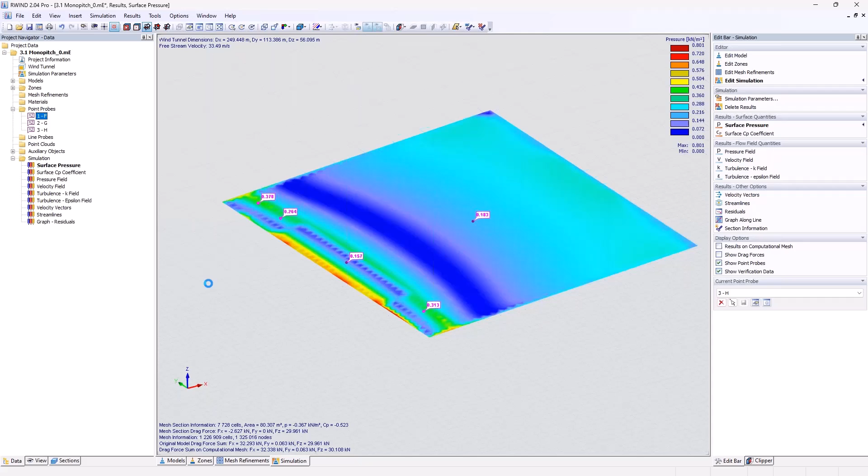So I was just about to jump into the point probes, but maybe my computer does not like it. Okay, so I was most likely even done with this. So let's continue with the presentation. I see I'm a bit ahead in time, but I think this is no problem.

So last but not least, the prospect of today. We, of course, try to constantly expand our database of verification examples. If you do not know, you can find them in our download area. There is the verification example area where you can filter for RWIND and RWIND 2. And there we provide already some validation. For example, the latest one, a validation and comparison to a Japanese wind tunnel database, where zones were created, double checked and compared to the standard.

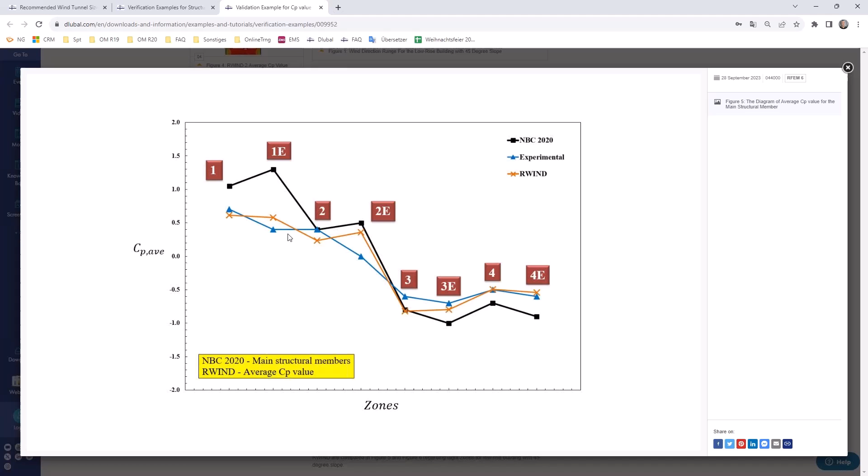Where is the experiment? Where is the standard? And where are we? So it's not about judging what is the correct result, because I think nobody really knows what assumptions the standard really did in the past. It's most likely just about getting a feeling: is my CFD model matching with reality or not? And maybe I can even get lower values, which might be a bit more economical, but still on the safe side.

You can find all the input values, and if you scroll down, there should also be the model to download. So you can already gather these models. Maybe if you have a similar model, put them into the tunnel with the settings we did, let them run, and then gather the information you may be curious about.

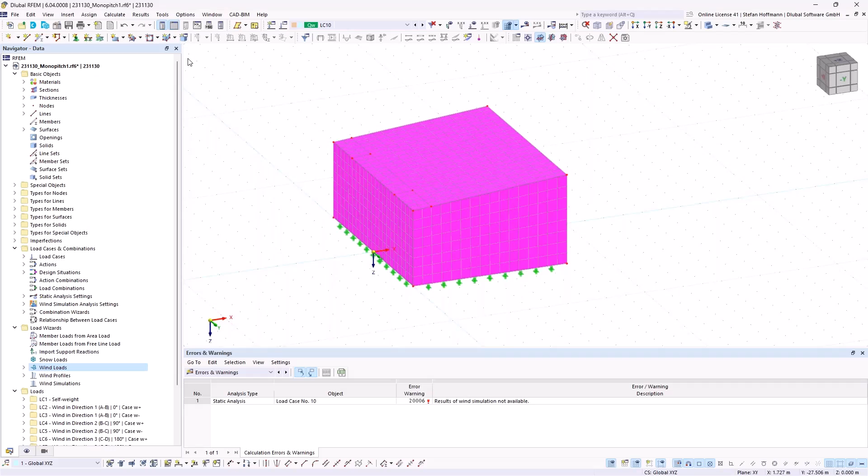What I did not show this time in the webinar is the connection of the results from RWIND to the RFEM GUI. What we are going to introduce more is that you can run RWIND as a solver in the background. There is a tab then in here, if you are in the wind analysis load case, where you can switch to the RWIND results. Currently, I think it's only the pressure and the Cp coefficient being drawn in here in order to be evaluated.

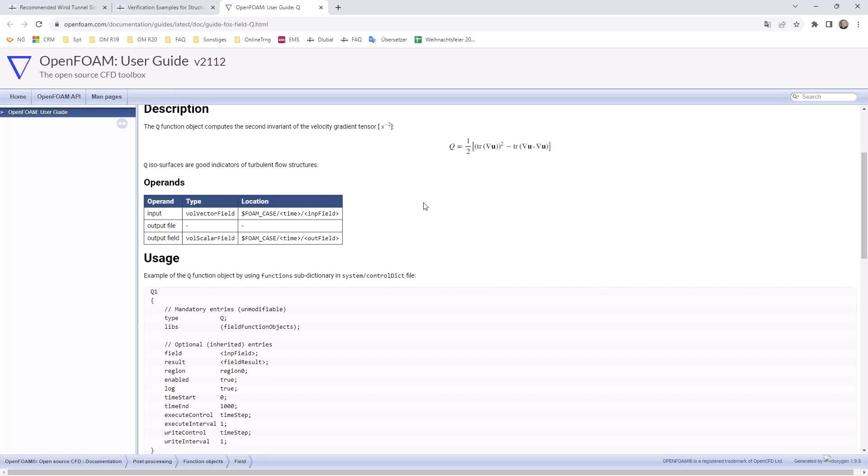We also plan, that's not fixed, the expansion of the result values as Q-ISO surfaces. I had never heard about them yet, but I'm not that scientific a CFD analyst. You can find information in the OpenFOAM user guide about what this vector field is about, and if it is useful for you to evaluate your model, you can check out these results hopefully in an upcoming version. And last but not least, we are planning to offer more wind tunnel scaling options that can be transferred from the RFEM GUI to the RWIND GUI.

All right, Andreas, I'm a bit ahead in time, 5 minutes, but maybe you can close the gap and I would hand back over to you. Okay, thank you, Stefan, for this nice presentation about the current state of RWIND. And yeah, we're quite curious whether the features will be integrated in the program soon.